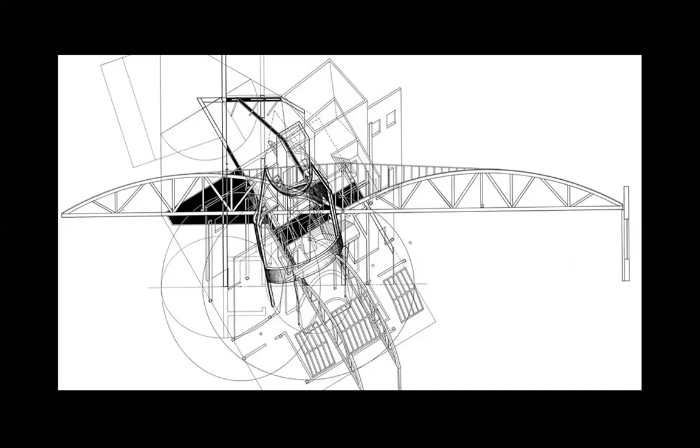And I hope to be able to somehow evoke what I want to say. Let me make sure somehow, okay, it is recording.

So his architecture is visceral, is both monumental and fragile. And I think he works with opposites, with paradoxes, with conjunctio oppositorum, and his spaces are very intricate, and the articulation is beyond the simple reading of reason alone.

In fact, in an interview, he said that he is animated by instinct. And what is instinct? Well, in a way, instinct is the opposite of the system. You know, instinct is visceral. It comes from your whole being. It doesn't come only from the brain.

And in this, I truly am on his side, because I think we overvalue reason. And while reason is necessary, Einstein himself said that reason should be just a companion and nothing else of a vital force, which probably can be approximated with what he meant by instinct.

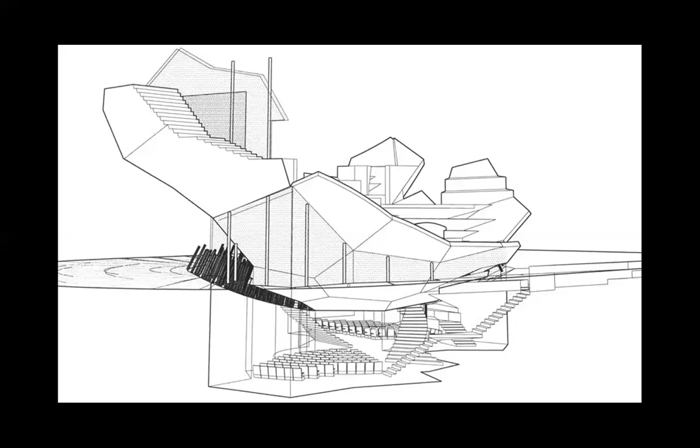So his architecture is subjective, but then is there only objectivity in the world? I am convinced it is not. Even the most so-called objectivist person in the world is subjective. There is subjectivity in the most extreme form of objectivity. So subjectivity is not only unavoidable, but it is actually an intrinsic part of life that could be beneficial if we only embrace it openly.

Unfortunately, again, the timid ones, afraid of allowing their subjectivity to manifest themselves, they torture themselves and others in the name of systems, methods, analysis, and so on, forgetting synthesis. And the synthesis is actually not done by the brain, and certainly not by the brain alone.

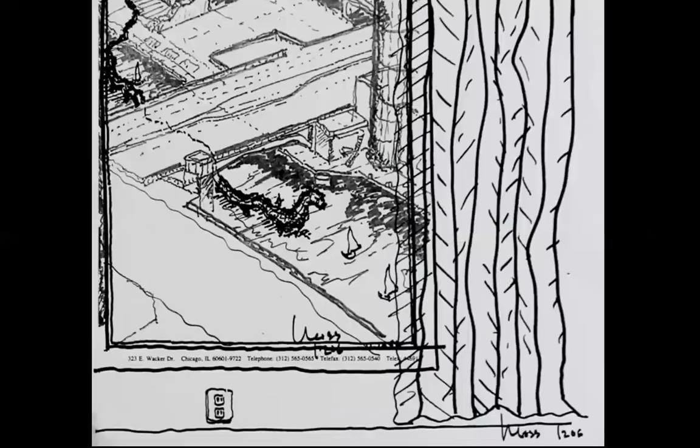He's trying to do a work which articulates complexity in terms of its own specificity, that is complexity. There is also a roundness in his work, which I would say somehow goes against some of the explosions and implosions of deconstructivism alone. But there is more to it.

For example, Wolf Prix said that in terms of drawings, Tom Mayne, also from the West Coast, who got the Pritzker Prize and runs Morphosis, that's his practice, is very good with drawings, while Eric Moss is very good with words. Well, I think both Tom Mayne and Eric Moss are good with both drawings and words, maybe in a different way. In the case of Eric Owen Moss, being that he was very and is very fond of literature, maybe also because his father, as I read, was a writer.

I mean, you look even at this drawing. This is not truly a modernistic drawing. There is nostalgia here. Look at these animals here in the water, and look, there is also an infantile, a childlike quality in the drawing, and the figurative part. I mean, look, we even have the electrical outlet here, and how the curtain is hanged and so on. So what we see here is a drawing, in a way, not really modern, and certainly not abstract.

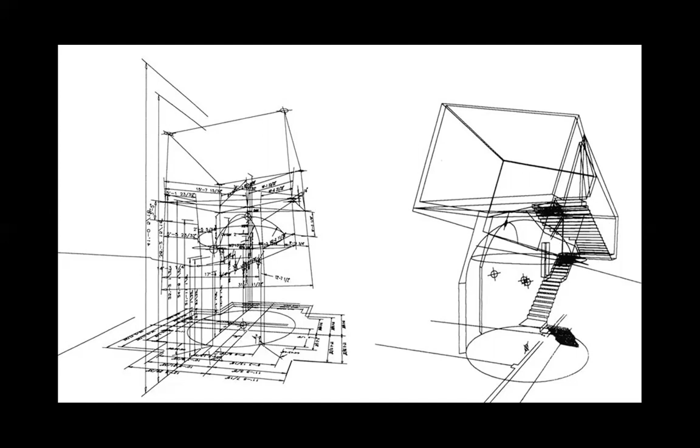His architecture can be very abstract and very so-called modern, although there is somehow a shade of medievalism, if I can call it so. We'll arrive at some works that exemplify this. Now we look at some of his sketches, a house he built. This is a man who doesn't seem to have a lot of inhibitions, and that's, I think, not easy to arrive at.

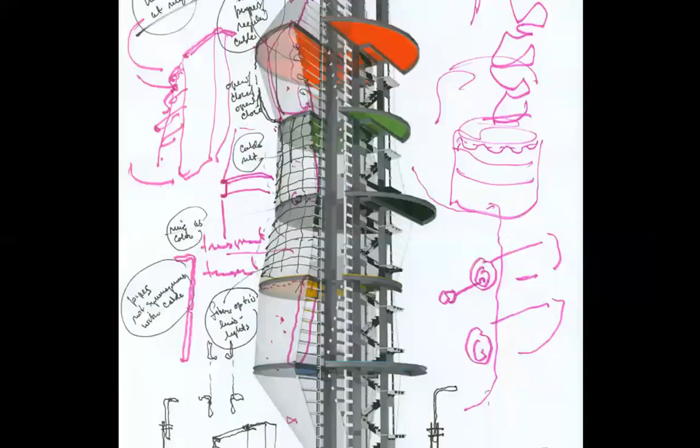This is the tower that he built in Los Angeles, and the structural engineer was our friend Bruce Danziger, who I was hoping he would be able to attend, but it is Sunday morning in Los Angeles, and anyway, who knows, maybe later he will show up.

But through Bruce, I was able to send the invitation to Eric Owen Moss. I mean, today I also sent him to his website, or his office, but Bruce did send an invitation to Eric 2 or 3 days ago. And Bruce was the structural engineer for this tower. We are going to see it in detail. It's an excellent construction, I would say.

So you see here, the rational system is sabotaged. And I think the rational system does need to be sabotaged, because reality is not only analytical, it's not only rational, it's not only strict. We all need freedom, we all need expression, and these things transcend the limitations of the system.

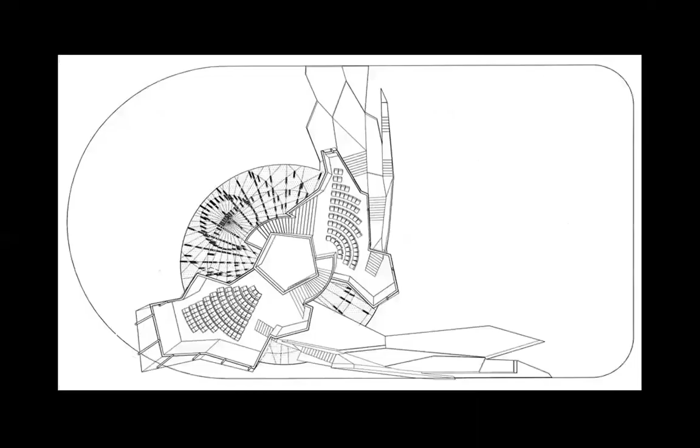Of course, he is using now developed technologies, maybe not as developed as in the case of Frank Gehry, but I think that the intuitive architecture, and maybe even the instinctual architecture, of Eric Owen Moss is different from, let's say, the one by either Frank Gehry or Tom Mayne.

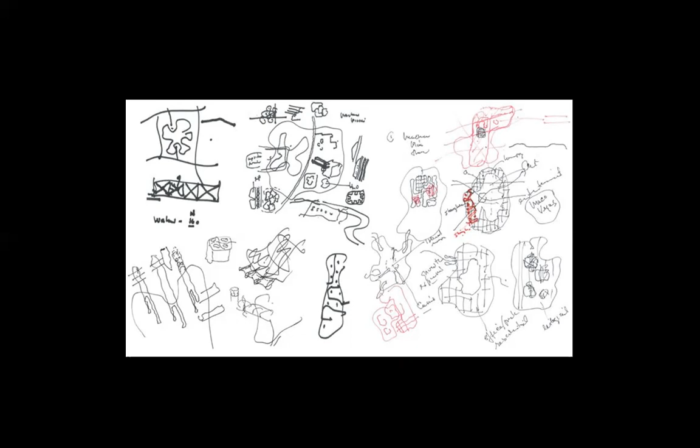There is a certain circularity, as if somehow Eric Owen Moss believes in the periphery, believes in the dissolutions and fragilities of the periphery, but also he believes somehow in a center, almost in an old-fashioned way, I feel tempted to say. This building was built, and we are going to see it.

It's very musical. It's very playful. It's a chance encounter with chance architecture. But he also has, as you can see, the circle, and even symmetry sometimes, like here, seems to be present. But then he sabotaged it. He also works with collages, like in this case.

Now we'll go chronologically through all the works that were mentioned in the Wikipedia entry on Eric Owen Moss. The triplex apartments in Playa del Rey, California, from 1976.

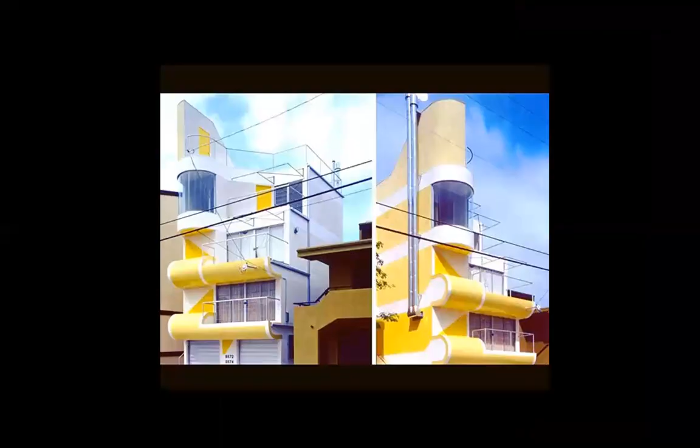Even by the standards of today, I would say that this building looks fresh and interesting. This is the model, as you can see. It's California. The colors are Californian, but we have to acknowledge it. It's a playful building, and I think it passes the test of time.

1976, so 24 plus 21, 45 years ago it was built, almost half a century ago.

Now, warehouse—I have to say he actually worked with a lot of warehouses and a lot of unglorious circumstances. Maybe you know already, he moved after he opened his office to Culver City, which at that time was, you know, a press city in a way. I don't know a lot about Culver City, but from what I read, when he moved in, there were a lot of parking lots and warehouses.

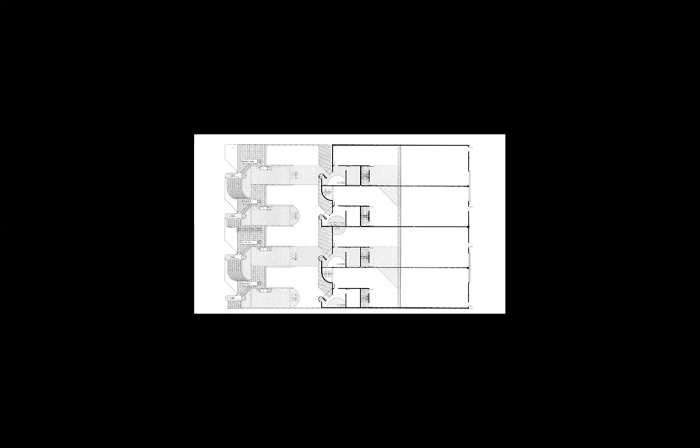'708 house. It's a house in Los Angeles. Still, I'm afraid, with pictures not with the best resolution, but soon I'll correct myself, and you'll enjoy large pictures.

1982. Even here, there are interesting things happening. I mean, look at that unperpendicular, or non-perpendicular, column here. These are, you would say, exoticisms. Look also at the innovative ornamentation of this facade, which is capricious, but is not disrupting the syntax of the building.

It is necessary, and I'm glad that Eric Owen Moss understood that building shouldn't be just structure, that you also need the capriciousness of ornament. And on the other hand, he didn't succumb to the incoming malevolence of postmodernism too much. Although there is a work where there is a little bit of influence, but here I think he's still pendulating between modernity and the playfulness, which is not rejecting the ornament that he welcomed.

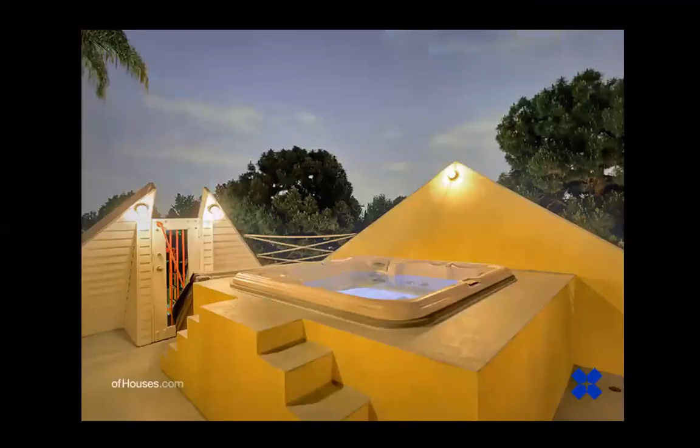So the petals open up at the top of the building where there is also this sauna or little swimming pool or whatever it is.

Now, the National Boulevard, 8522 on the National Boulevard. I don't know if I have pictures with this one. I do. Okay, now, thank God, we are beginning to have larger pictures.

I mentioned the medievalism in his architecture, and it's an interesting conjunction between the clashes of modernity, even the incoherences of a certain kind of modernity, and a certain nostalgia. I think Eric Owen Moss, despite his very convincing moving forward in architecture, also has, sometimes at least, traces of a certain nostalgia. I think he welcomes the labyrinth, zones of shadow which are somehow pre-Renaissance. Some of this architecture has scenographic qualities, if I can call them so. But all in all, it's an architecture which welcomes diversity and multiplicity.

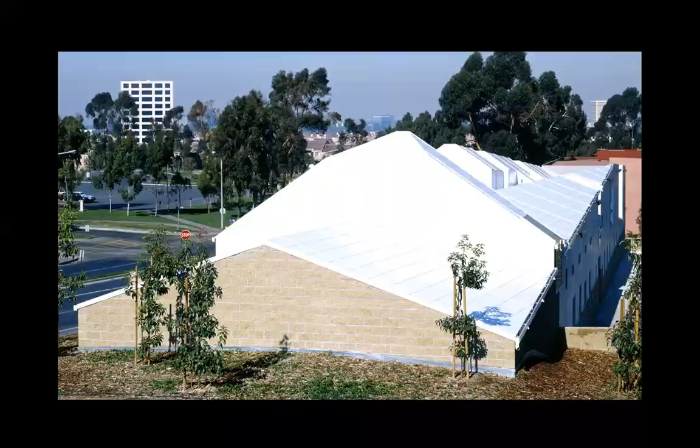The UC Irvine Central Housing Office from 1989. He built all kinds of buildings, not just in Culver City, but mainly in Culver City. I think his work achieves, on one hand, a level of cohesion because that is his city, so to speak, and also his most eccentric architectural gestures take place in Culver City. But this is a different city. And even here we see this ability he has to create multiplicity in unity. It's a building which does have unity, but also has fragmentation.

Here the purist might comment - I hope I have it, no, it's a little later on. Anyway, all in all, this is a building by Eric Owen Moss which does not contradict the following buildings we are going to see. He works both within the field of res privata, meaning private houses, and also res publica, meaning public buildings. I think he's able to bring the private into the public and the public into the private. Or, as Jean Nouvel said, bring the office into the home and the home into the office. And I think Jean Nouvel was right as well.

Lindblade Tower in Culver City, this is an interesting building, but it's not one of my preferred ones by him. When was it made? 1989. Yes, the 80s were a difficult period, in my opinion, in architecture because of the pressure that postmodernism put on architects and architecture, and it was very difficult to escape the seductions of looking backwards. This is not one of my preferred buildings by him, I have to confess.

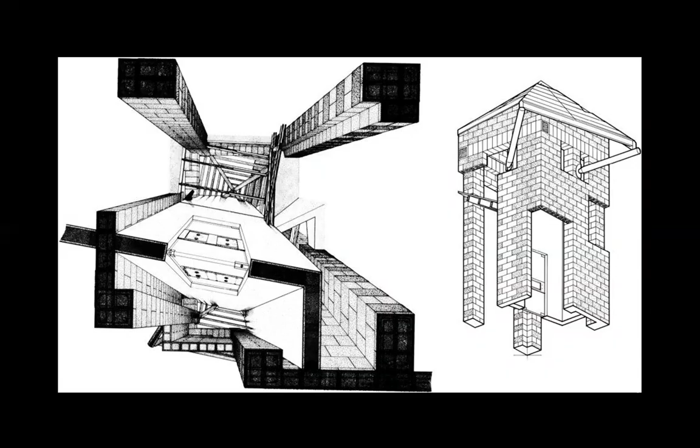Anyway, the joy of drawing. There is a voluptuousness even in drawing. He didn't have to do this drawing, but it's the exploration of the building through manipulating the drawing in unconventional ways. The drawing is important in Eric Owen Moss's work.

Now, Paramount Laundry in Culver City. We are now in Culver City, 1989. At that time, at the end of the 80s, I see a little bit of the shadow of postmodernism in his work, but he will transcend it.

The purist would protest this column here—does it need to be so majestic, although it is sloping to support this little corner, this beam? Probably not, but it's whimsical. At that time, many architects worked with similar gestures, like Stanley Tigerman and others.

Again, this work done in the second half of the 80s is to me a little bit problematic, exactly because there was something in the air then, and I know it well because I lived in the States at that time. It was very difficult not to be affected by a certain malaise which had to do with the approaching end of the millennium, and thus also a certain nostalgia, looking back to history and so on. This could be seen as a kind of commentary on the fragility of culture, even, not just of architecture.

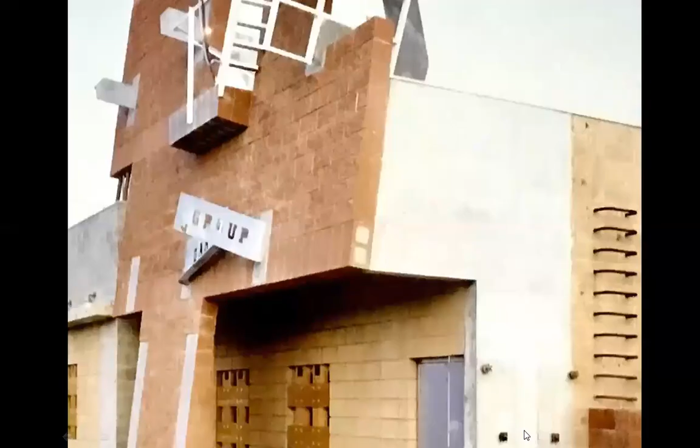This is an architecture that is disruptive because it has a certain theatricality. It is theatrical. It has something of stage design, but I don't know if I can articulate properly what I want to say.

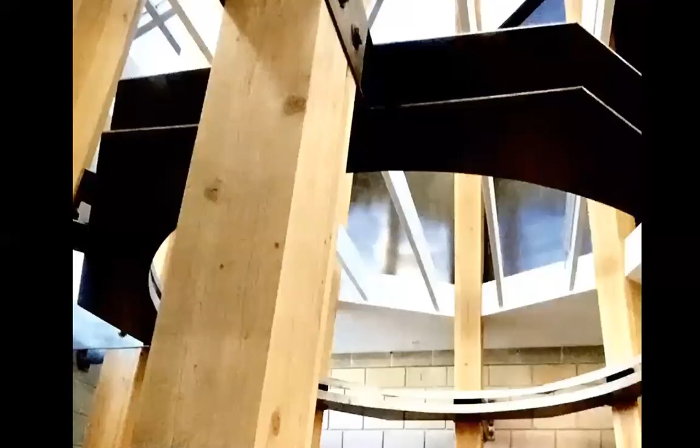There is an architecture that is rejecting the rationalist agenda, and it's promoting a certain imagery that is in a way inspired by history, but in a—I don't know how to say it. Maybe I shouldn't say it. I have a certain intuition about what maybe animated him when he created this—it's an architecture that is not giving up on the circle, but

at the same time is bringing in betrayals, the betrayals of dismembering, and I think somehow in this there are specificities in the work of Eric Owen Moss: the circle as a paradigm of wholeness, of unity, and then distortions and fragmentations which challenge the circle.

It has been said, I think this came from Giordano Bruno, that the world is a sphere whose center is everywhere and whose periphery is nowhere. You could also, paraphrasing Giordano Bruno, say the very opposite: that the world is a sphere whose periphery is everywhere and its center is nowhere. But then, is it still a sphere? I think Eric Owen Moss is, if not obsessed by the sphere, very interested in it.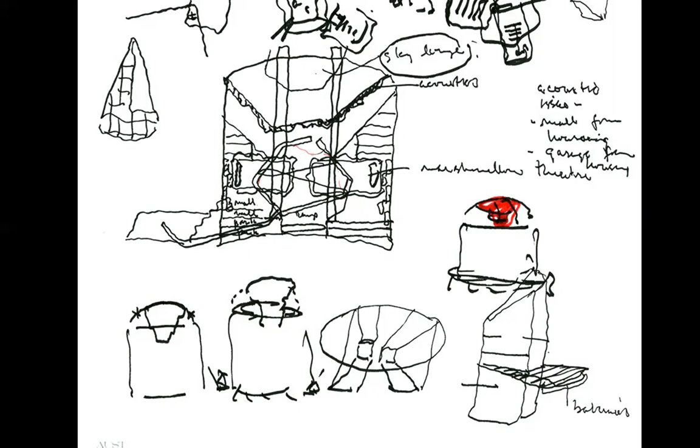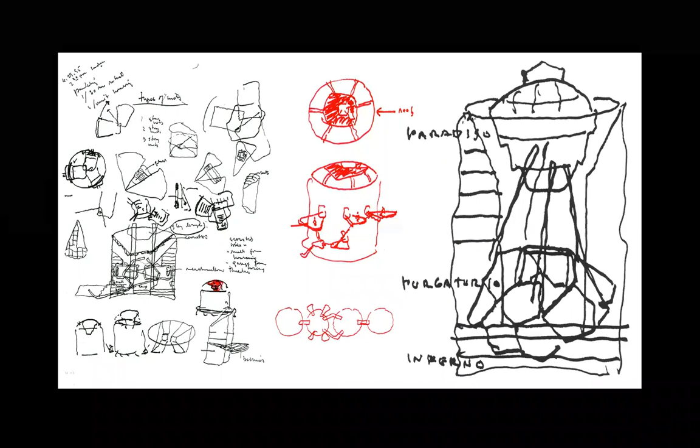Well, I see here references to Dante: Inferno, Purgatorio, Paradiso. Are we thinking of such matters when we design? It's true, we don't often have such occasions, but maybe we can create such occasions, at least from time to time. This is an interesting work here, and it's not just the tower, but also this building. He has influences from literature that are very informed, and those references sustain his imagination.

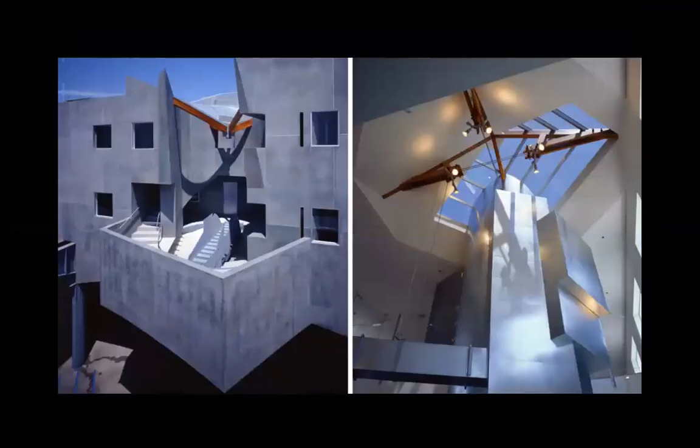I think we also have to acknowledge the presence of the mask. The mask in architecture is a theme which is probably worth considering, and there is a mask here. I think the mask can be very beneficial for architecture, even the veil, sparsity. For this one I didn't find pictures. Hayden Boulevard, another building in Culver City.

So you see, he's able to marry a certain rhythmicity that is almost rational, but then there are betrayals. And it's this conflict between a rational system, which is not totally developed, and something else, which maybe has to do with what he called instinct or intuition, or the irrational or the subjective.

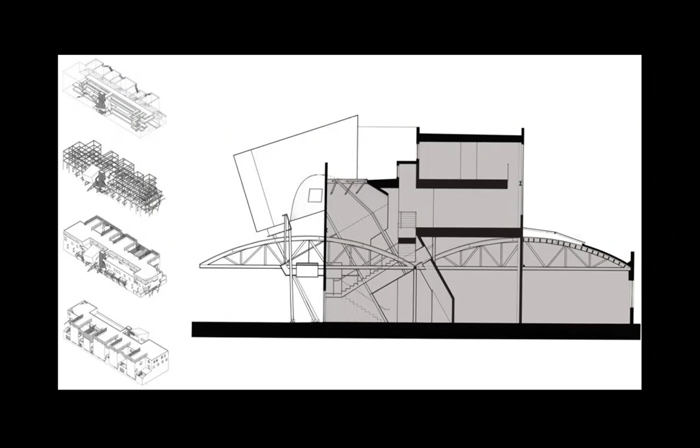Dancing bleachers - this I don't know exactly what it is, I didn't investigate, I only have a few pictures here. But as you can see, he takes risks, and if you inspire yourself from other fields and not just from architecture, like Wolf Prix said, if you only think of architecture, you'll only get architecture.

Well, Eric Owen Moss inspires himself from other fields as well, not just architecture. This is one of my preferred buildings by him, because of the umbrella which gave the name to the building, which is a brilliant architectural capriciousness in a way, is this thing here. The purist and the functionalist and the morose moralist would protest, would say that this is nonsense, what is the meaning of it?

But I would protest too against them, because I think in a way, maybe this is an explosion of the id, the one that Freud thought is the condenser in a way of our psychic realities, emotions. Yes, it is here that the id breaks the box and comes forward in unsettling ways.

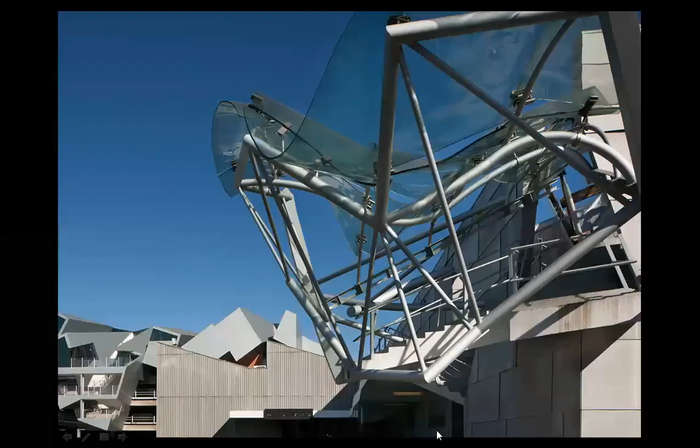In a way, what we see here is exactly what Walter Gropius was referring to when he said the artist is a craftsman who is exalted. This is about exaltation. Without this, the building probably would have been closer to prose, but because of this, it leans towards exaltation. And I think we need more exaltations in the world.

So this is the umbrella building, and this is another building by him. You already saw a sketch by him, some drawings, but we are going to look at it in detail. It's an excellent building. So in this city, you can see several buildings by him, in close proximity.

Now let's look at this picture again. The purist, the functionalist, and the morose moralist would protest and say, 'What is this nonsense?' But they would also protest against John Ruskin, who said that in life and in nature, the most beautiful things

are the most useless, and he gave us an example: the peacock's tail and the lily. And so this is like the peacock's tail, and if nature allowed herself or itself the beauty of the uselessness of the peacock's tail, why shouldn't human beings do the same? Sometimes when it is possible. Why not? What is the big problem with this?

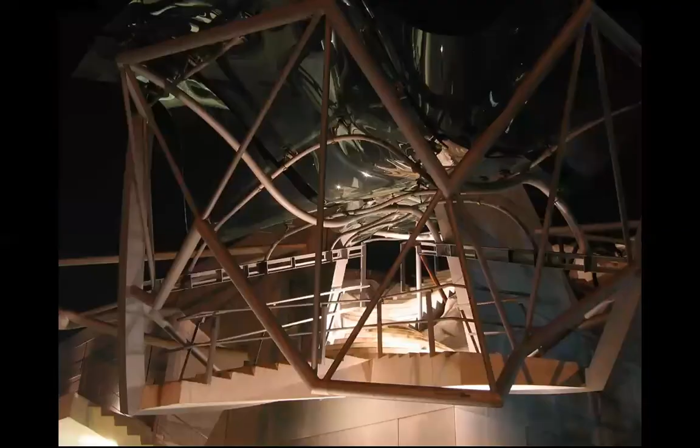And look at this, I recognize myself in this image. I see my soul, I see my torments, I see my dreams, I see my nightmares, I see my longings. Yes, I see my emotions, my subjectivity. What is wrong with that?

And actually, I think this stair that we can see here is better done than in many deconstructivist works, because in the deconstructivist works, the building might be exploded or imploded, but very often the escalator or the stair is conventional. In this case, the stair seems to long for being organic and disjuncted, and somehow closer in spirit and form to what is around it. And I think that's a quality.

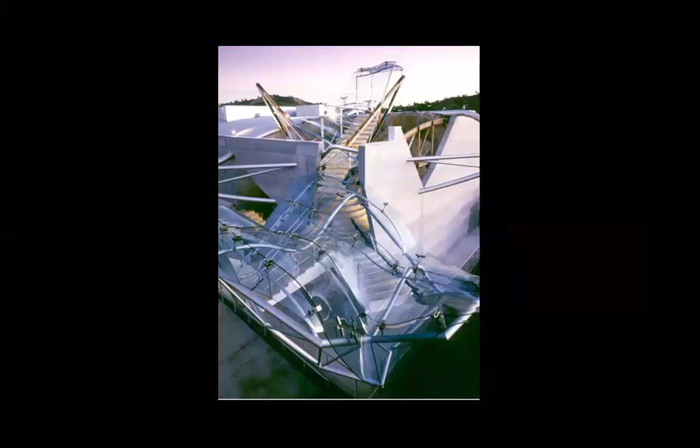Bravo, bravo to him, bravo to Eric Owen Moss. And I think this was done before the big changes in project making that parametric design and the computer brought in.

This one, I don't... no, I do have pictures of it. It's also in Culver City. We see that he's also capable of restraining himself and manipulating volumes and masses without the turmoil that we just saw in the previous work.

But yes, the diagonal and the inclined, the sloping surfaces, they exist. They exist because he's a dialectician, I would say. He constructs, but he's also aware of the other side, which is disruptive in the sense that it provokes

disjunctions and deconstruction. Yes, there is verticality. Yes, we have volumes which are clear cut, some of them even Cartesianly configured, like here, for example. But then there is the other side. There is always this play, this dialectic that I think informs his work. That's why his work is often surprising.

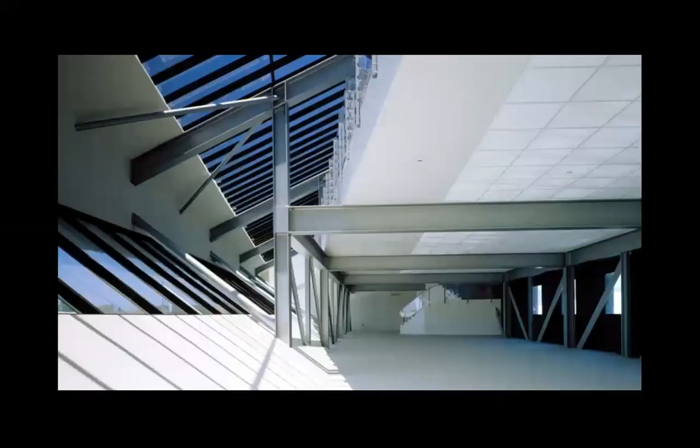Would we call this a clean architecture? Yes, it can be clean, if by cleanness we mean easily recognizable geometry, order, and less, much less disorder. But he assumes the disorder, which is dialectically correlative to what we call order. There is order and disorder, in other words, both.

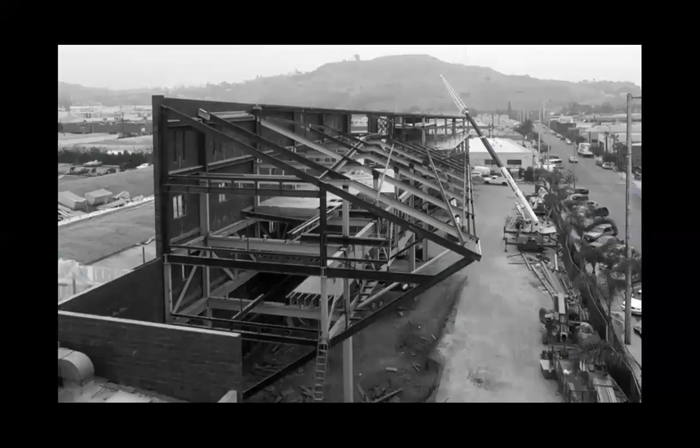During construction, but there are many events here. The entrance, look at this. There are many surprises and many architectural events in detail or at a larger scale.

Now, this is a project he did for St. Petersburg, which was not built. I show in this presentation a few unbuilt works by him, a few projects. There is a certain level of flamboyance here, but maybe it goes with a Russian spirit.

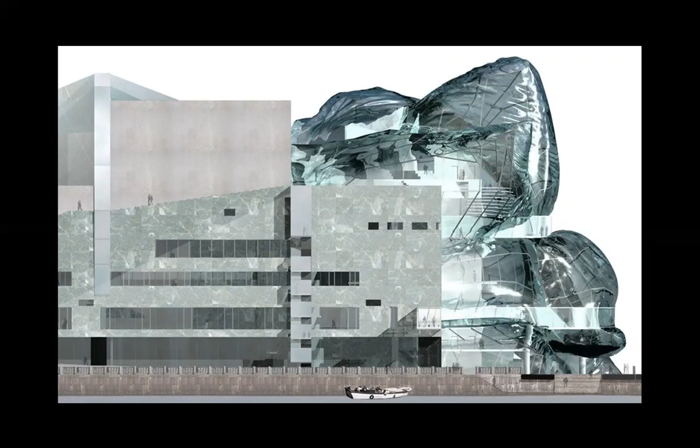And plus, it's a theater. It's supposed to be a theater, so why not? Otherwise, as we can see, the plan is very well organized and structured.

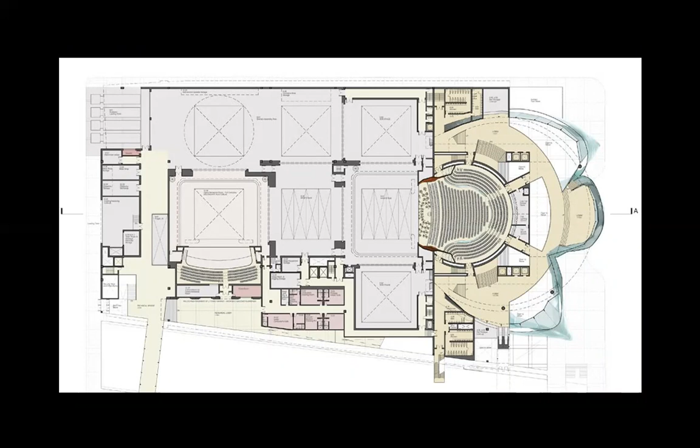Beehive, Culver City, 2001. And the beehive, it is indeed, well, to an extent, because it is abstracted, but towards, at least from this point of view, has elements of what might be called a beehive. As I said before, there is a continuous interest in the sphere, a deformed sphere. And you look at this image and then you look at this image and you see that the roundness of the world is challenged by a geometry which does not say no to even the acute angle.

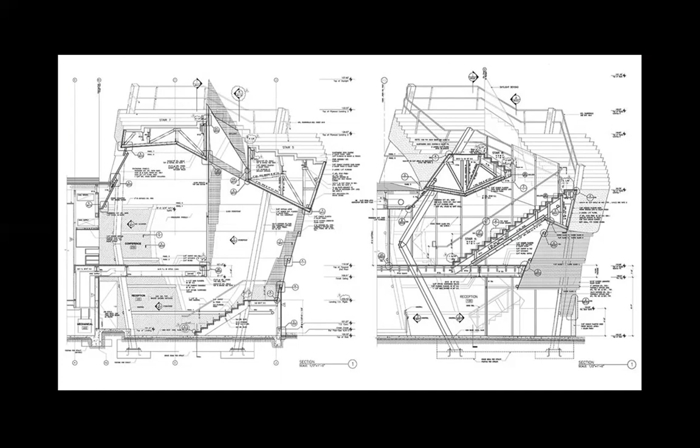I love these drawings. Yes, I cannot avoid our voluptuousness, because I think it is a pleasure to do working drawings for such visceral sections. In fact, there is somehow more viscerality in the drawing than in the final image of the work.

Maybe. This is a project that was not built, but I don't show pictures of it. This is a project where, for a competition I took part in myself. I didn't win. He won it. The Caterpillar in Los Angeles.

I don't know exactly what the function was here. If any of you is interested in this work, please search for it on the web. You can find some other information. I just show some images, but it is the same Eric Owen Moss in the sense that he's investigating what I would call again the viscerality of architecture.

It's a place maybe with some playful function. I read here, and maybe it's an interesting function for this, because he started, I guess, from the cylinder seal from various periods in the history of humankind. I don't know exactly what this was for, but as you can see, he's not just working with vectors and abstractions, but also with references to history for certain programs.

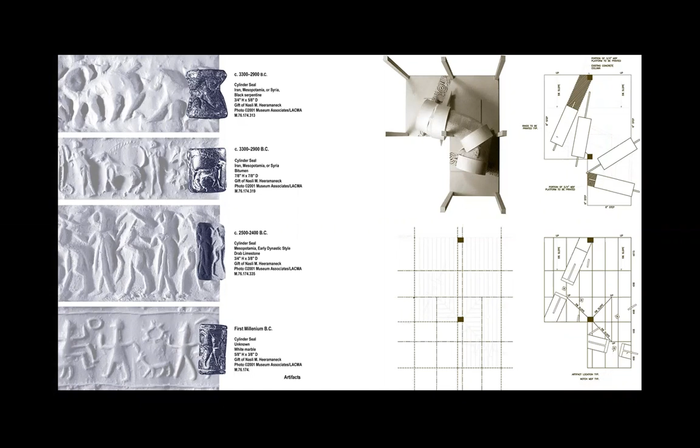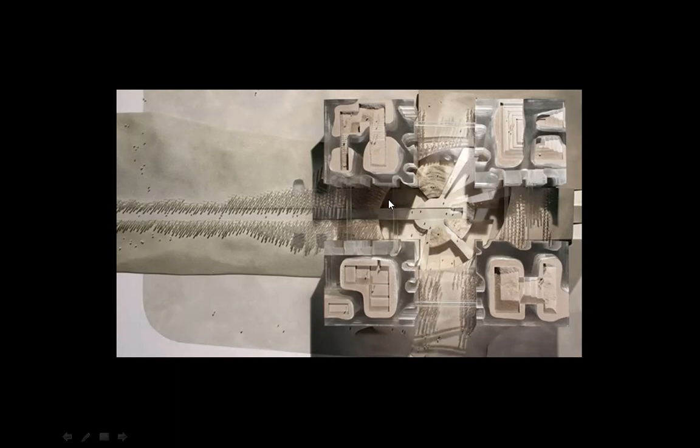If he is a conceptualist, he is not a dry conceptualist, because his signature is not dry, it's still wet. The Smithsonian Institution, the patent office building in Washington, D.C., was not built, but I don't have pictures. This one is unbuilt also, in China. I like the model, I like the top view here. I find that this is somehow very Chinese. I don't know if you ask me why, I don't know if I can tell you, I just feel it's very Chinese. Too bad it was not built.

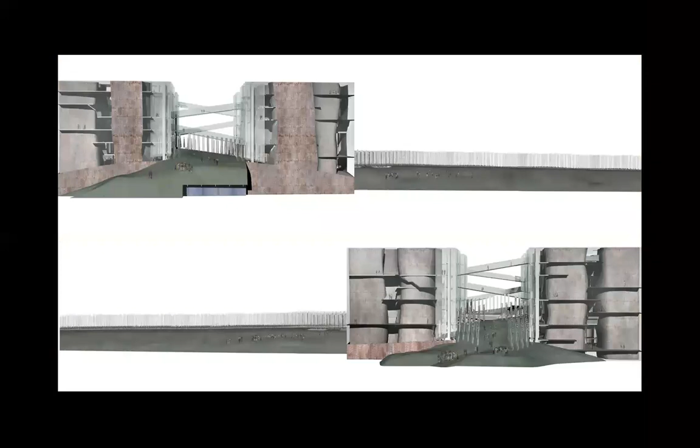Maybe seen from eye level it's not so much, but from the top, somehow the spirit of the work seen from above is a little bit simplified in these views at least, but this could also be misleading, these are just renderings. Huge museum, but it would have been an interesting work. I'm convinced, if it was built. Too bad it was not built.

He is without doubt, Eric Owen Moss, an architect who takes risks, and we didn't yet see everything. And his drawings, these are the drawings of someone who, in my opinion, considers history and the history of architecture very seriously.

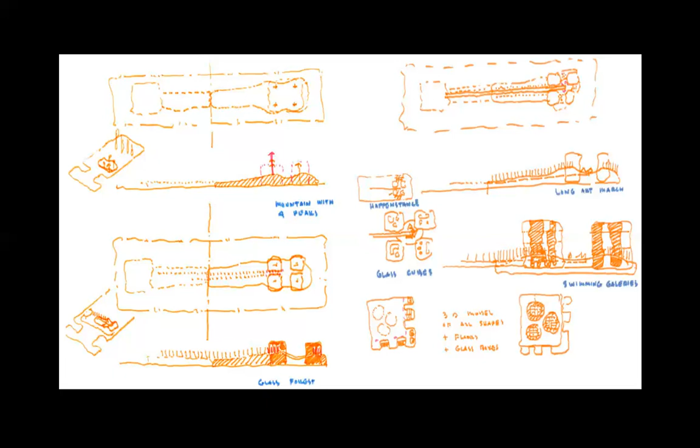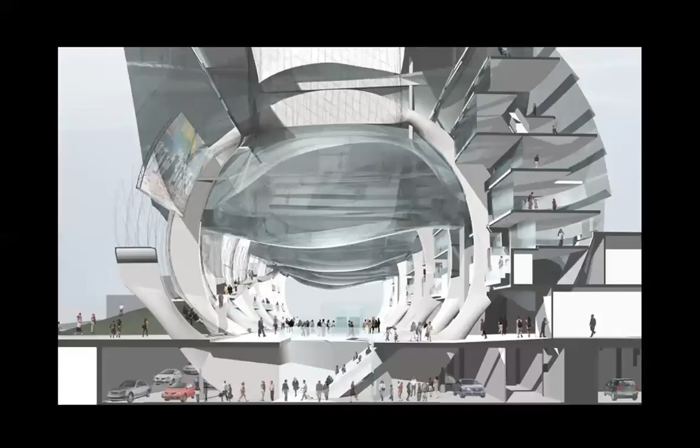Republic Square in Kazakhstan, in Almaty, from 2006. This is also an interesting project, was not built, but it can stir up our imagination, because he creates things which at times seem implausible. Like we'll see later on, an image from his Venice Biennial contribution for the Austrian pavilion. Again, roundness is present in his work in various forms, either bidimensionally or in three dimensions as a sphere, deformed or a little less deformed. But again, this is an architecture that could be uncomfortable, actually, exactly because of its uniqueness.

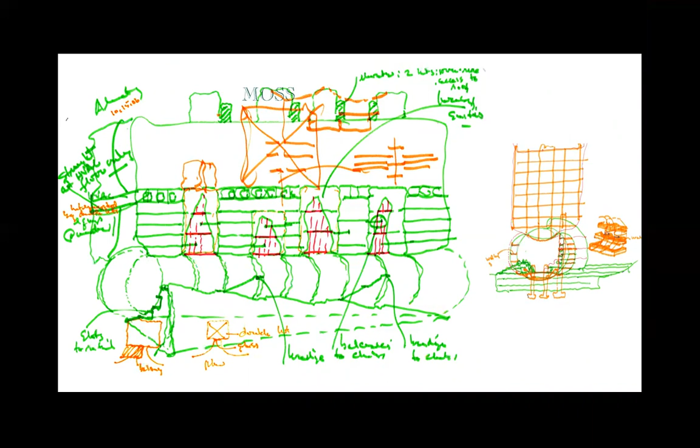I wish I had more pictures. Anyway, another building in Culver City, 3555 Hayden. This one is a little less interesting, in my opinion, or a little more predictable. Anyway, he did it, he built it. Not everything is supposed to be unseen before or so.

If not now, when? He did a project, I think, for Vienna, but also I have a book here from Vienna, which was given to us when I visited with students from Bucharest, and I think he has an article he contributed to, called the 'Massive Attack' Symposium in Vienna, and I think the title of his talk was exactly this. Let me verify if it is so. If not now, when? If this is what it is, I would like to read it to you, if it's not too long. The talk he gave in Vienna was called 'Build Your Cities on the Slopes of Vesuvius.'

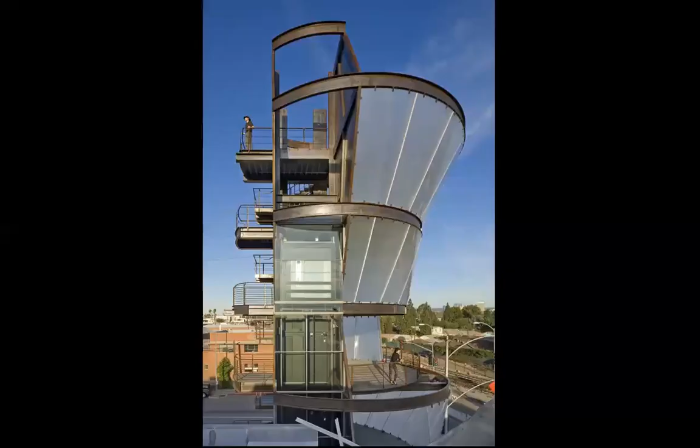Now we arrive at this tower, which I like very much, where Bruce Danziger was the engineer. It's part of that complex, Samitaur Tower, also in Culver City from 2010. It's Californian, but maybe I shouldn't locate it so strictly. I felt like saying it's the Californian replica to the revolutionary towers in Russian constructivism. The fact that he was able to actually build this is almost miraculous. I wonder who paid for it, and what is the function, I mean, this is not a mercantile building. I don't know its function. Somebody paid for this building, but the building seems to have an idealism which is in contradiction with high capitalism.

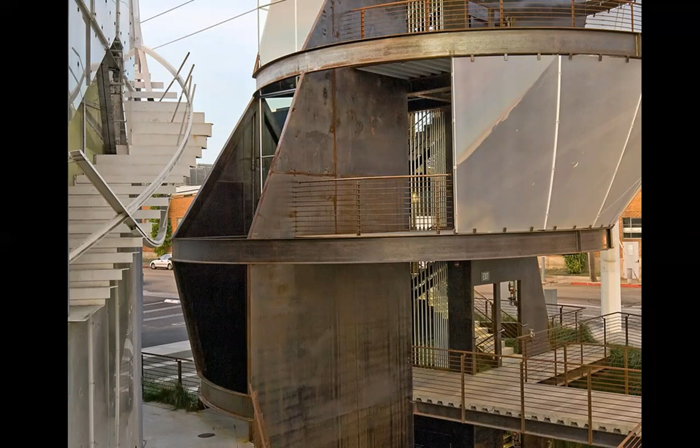So Dan, it's meant to be like a clock tower. Bruce, welcome, now you have to tell us about it. So what is it? Frederick Norton Smith and Laurie Samitaur Smith, his wife, they have a lot of property in Culver City, and this is right at the entrance of that area, and it's meant to be like a clock tower. So you'll see in some of your images that things are projected on it. So you said it's a clock tower? It's like a contemporary clock tower, people don't need it to tell the time, but maybe you could project cultural images. So you'll see there's those acrylic, those polycarbonate, plexiglass panels. There's projectors behind there that project, and they have artists come and curate projection images.

So I was right, this is an idealistic tower. It doesn't have a pragmatic function per se, no? Like the towers in Florence, the Medici Tower, does it have a function? Well, yes, but then you had the great Mecenas, they themselves had idealistic aspirations somehow. I'm surprised this kind of tower was built in Culver City without... does it generate an income, this tower? Probably not.

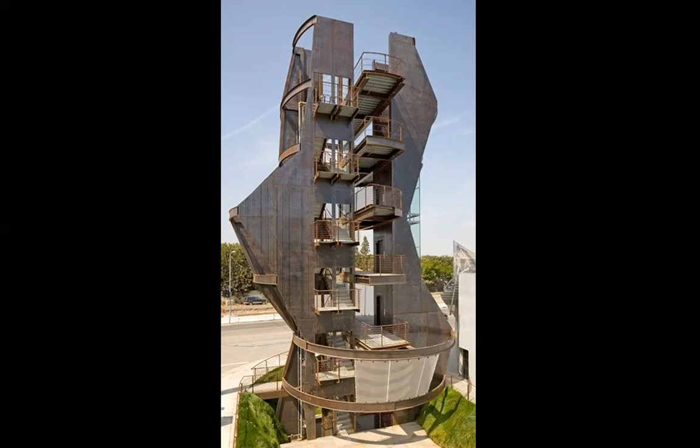I love this view, and I know he's very appreciative of this tower because I read some things about it. And maybe it is true what John Ruskin said, that I quoted from him, that there is a certain level of beautiful uselessness in this tower, which makes it even more beautiful. And maybe, my God, we could create beautiful things. Now I know I could be accused of being a hypocrite because in the case of Olgiati, I commented on the uselessness of certain parts of his work.

I'm not against uselessness, it depends. But for example, I feel much closer to the work of Eric Owen Moss because I believe he told the truth when he said that instinct is very important for him. I mean, I don't know him personally, but I think he's quite capable of handling rational matters. But he allows for these capricious decisions to also happen. And in all his works, I see the presence of something else, which is not reason alone. That's something else I try to approximate with the tale of the peacock, referring to Ruskin, or to Id, coming from Freud, or instinct, intuition, subjectivity.

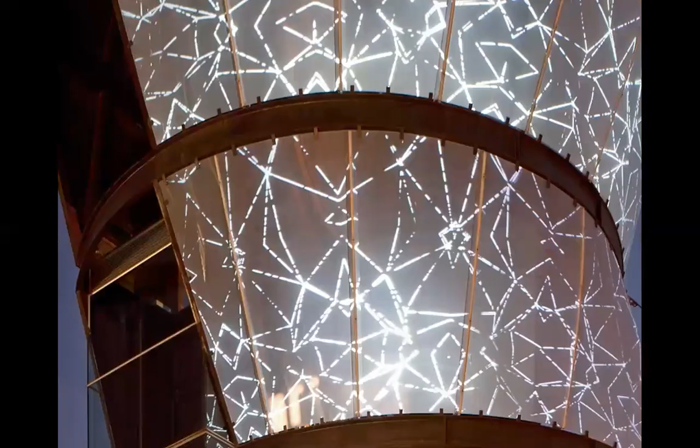Bruce, please help me with other words if you want. But I see in this tower a celebration of what I called before, using Ruskin's words, the peacock's tail. You know, I think we need such things in our lives. Okay, it's not always possible, not everywhere we have Florence, not everywhere we have the developers that luckily Eric Owen Moss works with in Culver City. But maybe in various ways it is possible to invoke the presence of the peacock somehow.

It doesn't matter if we are rich or poor, it doesn't matter, I think we can, because this, in my opinion, is about freedom. It's about the human spirit conquering strict necessity. What do you think, Bruce?

Yeah, I like where it's going, Dan. I'm kind of challenged to put it in a box, right? Okay.

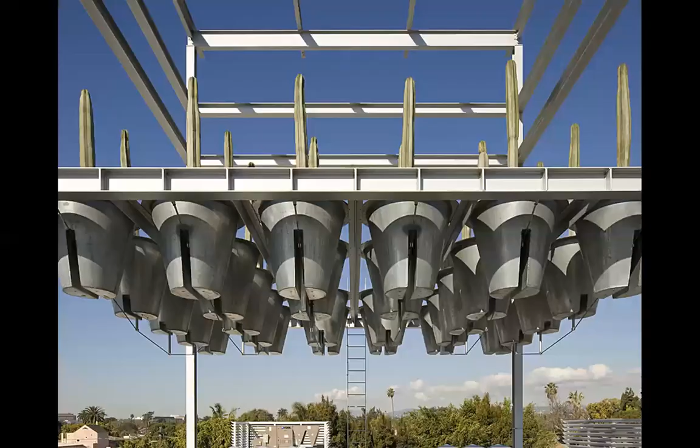So we go to the Cactus Tower. This is an interesting tower, very different from the previous one. At first I didn't understand why it was called Cactus Tower, but it's because cactuses are placed here - you see the cactuses. I don't know if he had this idea, or exactly why it was built, but again he's a surrealist architectural presence here. Who thinks of creating a floor only for cactuses?

What's going on there in Culver City? I have a feeling it's a place with some dreamers. Some people paid for this. I love it actually - I love the fact that Culver City is the home of the Wizard of Oz. That's where the movie was filmed. It has a history of movie studios going back 100 years.

This is very interesting. I think this is also his building, right? Here. We are going to see it a little later.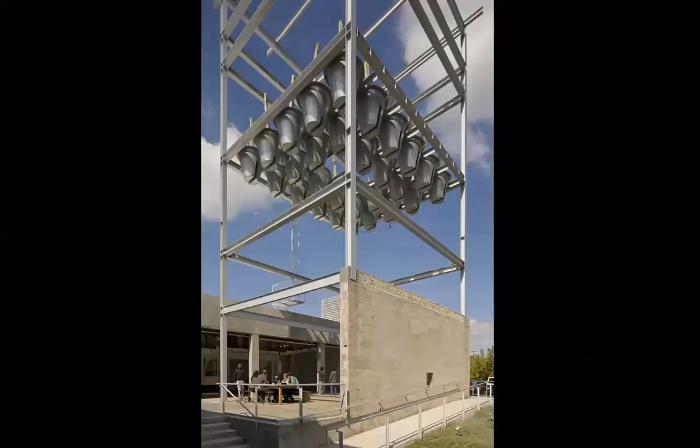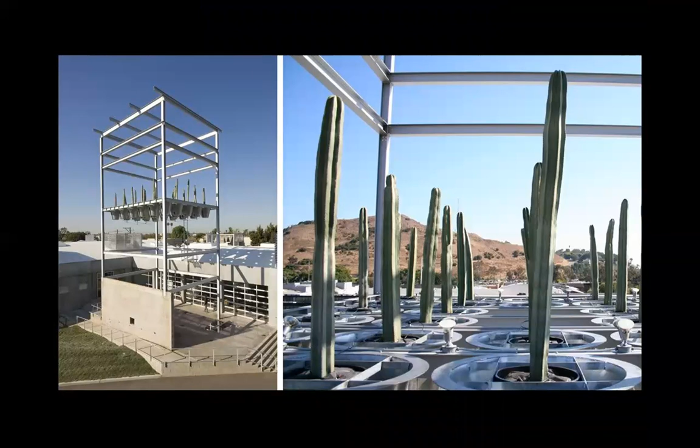This always puzzled me and continues to puzzle me - the meeting within North America, meaning the United States, between pragmatism and idealism. That somehow, sometimes at least, pragmatism at its edge becomes its opposite. Someone paid for this tower. I understand there is a room here, because I saw a picture from the inside, but everything above it is dreaming, really. It is dreaming. And I imagine it was not a very inexpensive dream.

I personally welcome surrealism in architecture. Although, again, someone would say, wait a minute, if you welcome surrealism in architecture, why were you so against that store by Golgiati? It's probably a good question. I have to reflect on it.

Do you know, Bruce, what is the function of this tower? What's going on in these spaces here? Oh, it's just in front - it's like a folly in front of an office.

So there's this area in Culver City called the Hayden Tract, named after one of the main streets. It's owned by this family, and they have a strong business case here. Their idea is that if you build art, you get higher rents. So you get media companies and advertising companies willing to pay higher rent if their office and the architecture is art. Right, so that's the premise.

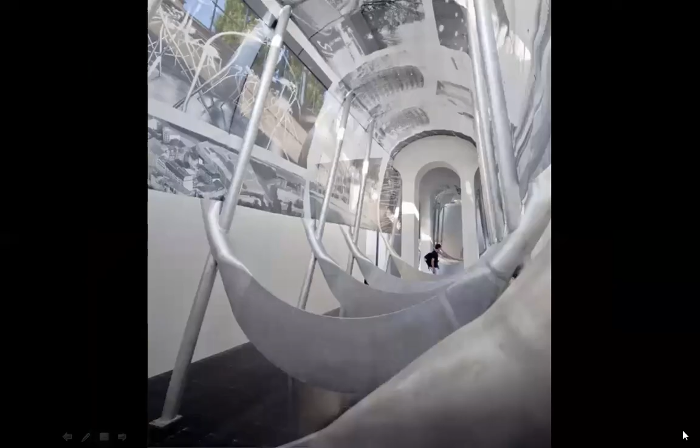For how many projects did you collaborate with Eric Owen Moss? Well, like 4 or 5. And so I know of 2 now. What other projects? I have here all the works that are mentioned in the Wikipedia, the American Wikipedia. Anyway,

But this is interesting - maybe you, Bruce, know something about this project in Barcelona, Tèrmiques del Besòs. No, I don't know anything about this. Almost science fiction, it's a technical project. I don't know what this means in Catalan, Tèrmiques del Besòs. I plan to investigate, but I didn't. But the work has, again, that reference to the medieval world, but also to futurism. It's both futuristic and with something medieval. I think such conjunctions are present in his work, at least from time to time.

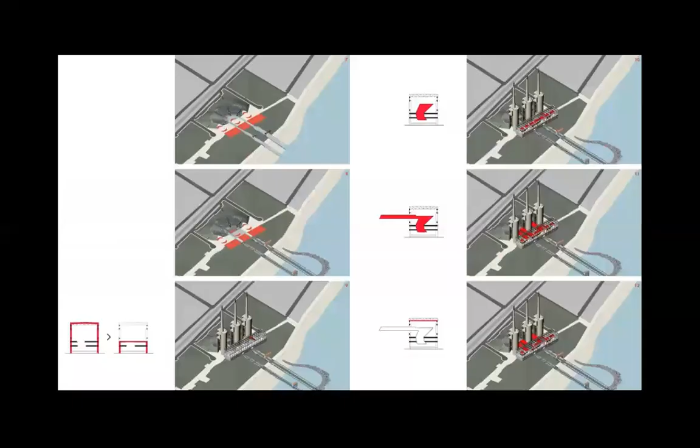These are giant, and they do have presence. I hope they build that.

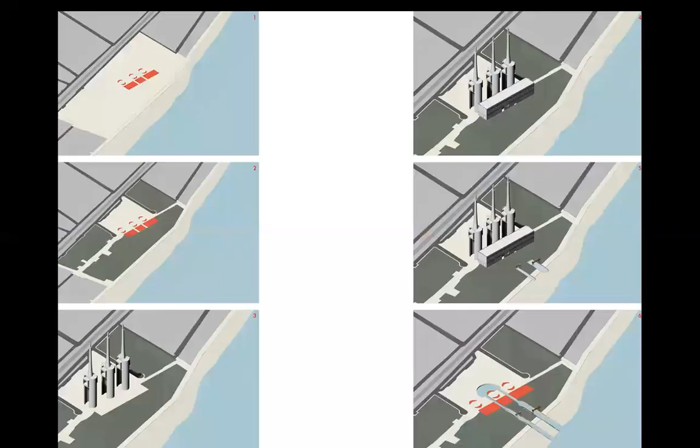The round towers, which for me are somehow medieval, because they are not glass towers, but they are opaque towers. Yes, they evoke for me a certain liking that I imagine he has for the medieval world.

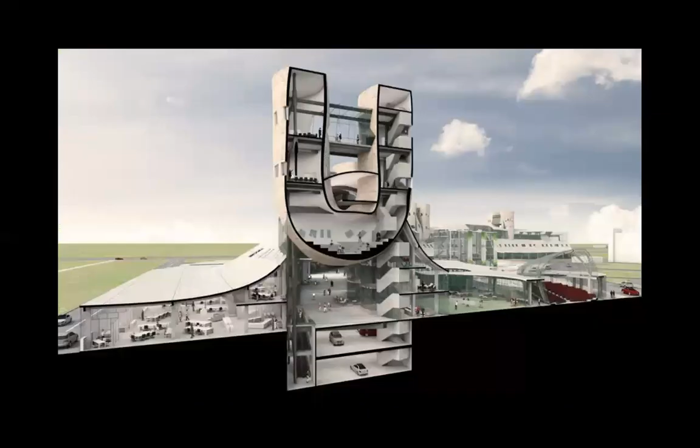I think his architecture is a difficult architecture, could be, sometimes. Like here, you have these opaque towers, sometimes contorted, with this unusual bottom, floating almost on thin air.

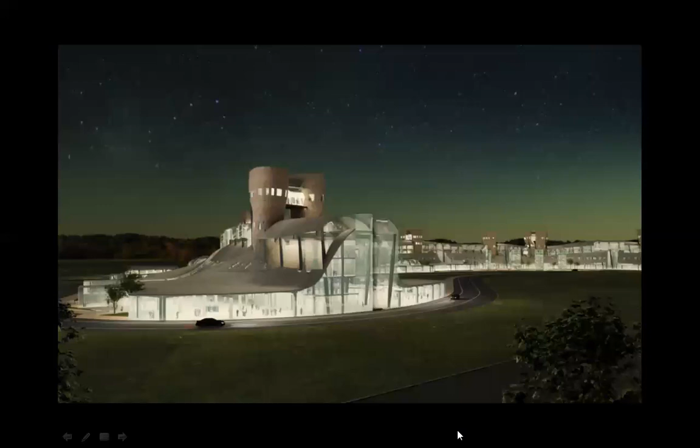But it could have been perhaps appropriate for Russia to build something like this, because I think the Russian culture and the Russian spirit do have a dimension which is in a way like this, a little bit almost burlesque, phantasmagoric. I don't know very well how to describe it now.

I think Eric Owen Moss also is not afraid to assume even what might be called the ugly. And maybe here I can recall the words of Peter Eisenman, who was searching for the grotesque, a play on the grotesque.

There are meetings between what we call the beautiful and what we call the ugly, between the princess and the dinosaur or the monster. And the sublime, as Peter Eisenman said, was born exactly at that juncture, at that meeting between what we call the beautiful and what we call the opposite of the beautiful. You can call it ugly or monstrous even.

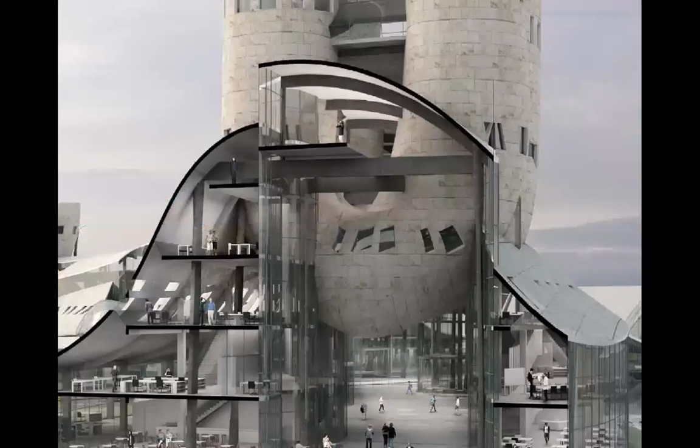This is a difficult topic. Maybe the beautiful in itself is not enough, because the beautiful by itself does not arrive at the sublime. In order to arrive at the sublime, you also have to assume the opposite of what is beautiful. But what I see here is a fantastic architecture, and I regret it was not built, and probably it will not be built.

We are approaching the end of the presentation. It would be interesting to even study these sketches and read what he wrote, and to discover the sources of the design.

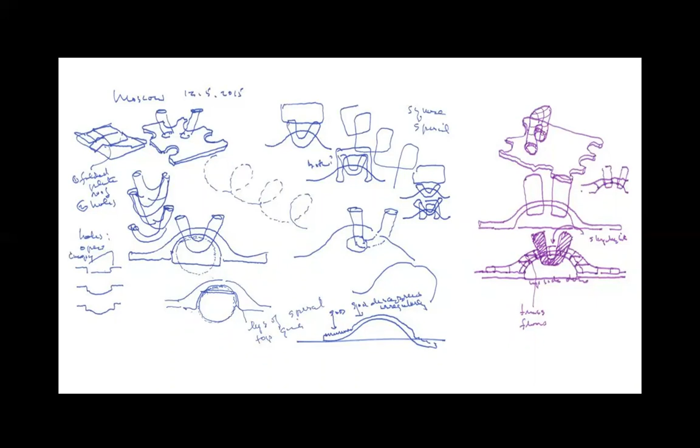I think Zaha Hadid also worked for this project. It might be that this image is actually from Zaha Hadid, I'm not sure.

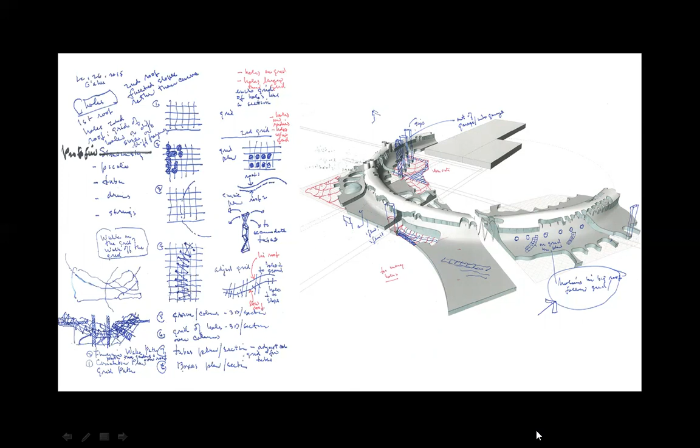And I like his sketches, les mots et les images, the words and the images. You can tell he's not - I mean, he talks about instinct, but there is also reason here, clearly. Even in the graphic aspects of his sketches, you can tell he can be very organized and logical, and he works with points, A, B, C, D, 1, 2, 3, 4, and so on. So he's not just this instinctual beast, so to speak.

No, far from it. Vespertine, Culver City. This is a newer building from 2017.

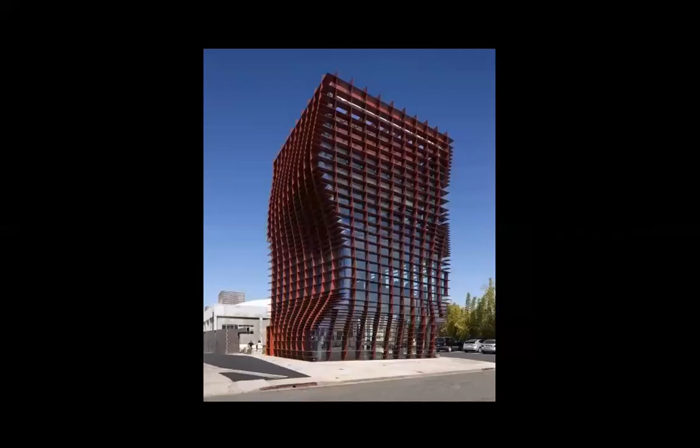He's building now - we are approaching the end of the presentation - another tower, not an excessively tall one, certainly not like the ones built by SHoP in Manhattan or Brooklyn. I like this building, it's again the problematization of the grid as an expression of reason, bringing in the other forces, the subjectivity, the subject, what is subjective, the irrational, the curvature, the capricious, maybe meandering, and yet it is structural, it is ordered.

It's a good tower, I would say. And I like the fact that you can't easily read how many floors it has.

So although he talked against the system, he can also be systematic, but not in a dry way, because his signature is not dry. So the system is humid, if I can say so. It's not a dry system.

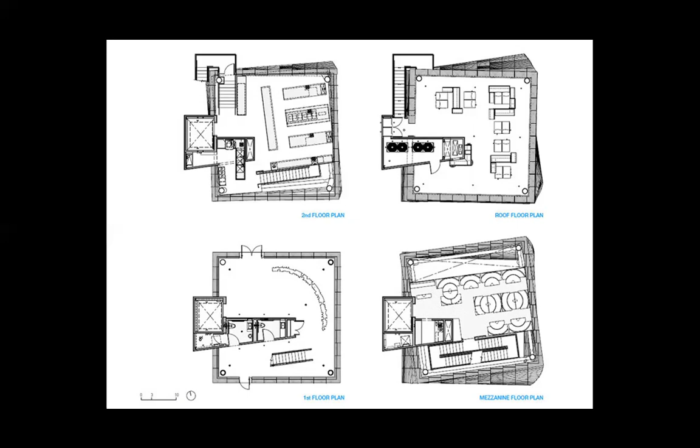Now the Wrapper, and now we end our presentation on his works. This is a building that is still in the process of becoming, but construction started, and we'll see a few images.

I'm particularly fond of the knot. I like knots, and I like this kind of - what is the knot? The knot is an expression, in a way, of the unknown. And it is a scandal for the intelligence. It is a scandal for reason.

And this building is telling us that things are not as simple as previous forms of functionalism or international style or rationalism and Cartesianism, objectivism claimed. The world is a web now. It is a web, and I see that this is a webbed building in a way. It's a woven building, and I like this aspect of being woven, and I like the knot.

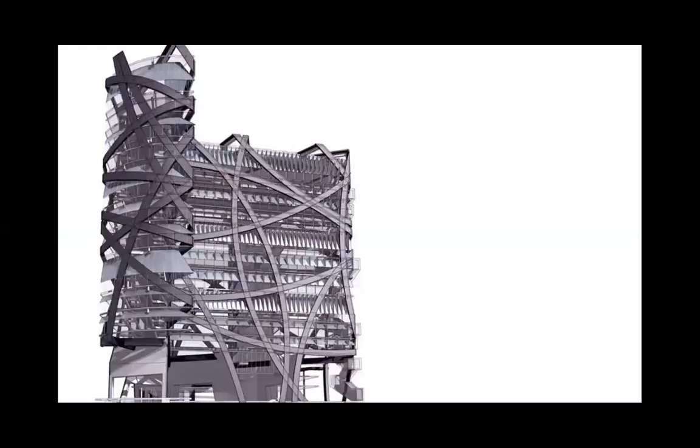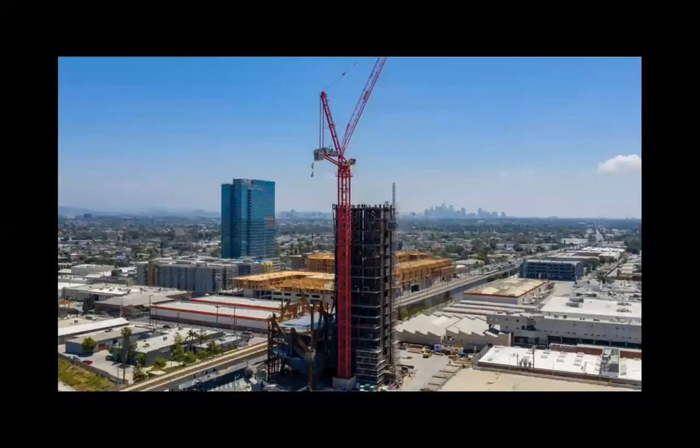And I'm glad it's being built. Here it is, the construction site. Another adventure by Eric Owen Moss.

And as I keep saying to myself and others, architecture is beautiful and worth pursuing if it is an adventure. If it is not an adventure, then - well, life itself is beautiful if it is an adventure. But we know that adventures have luminous parts and parts which are problematic, sometimes even painful. What can we do?

So here it is. The adventure started, and these people are willing to move forward, as we can see. The building will be built, is being built.

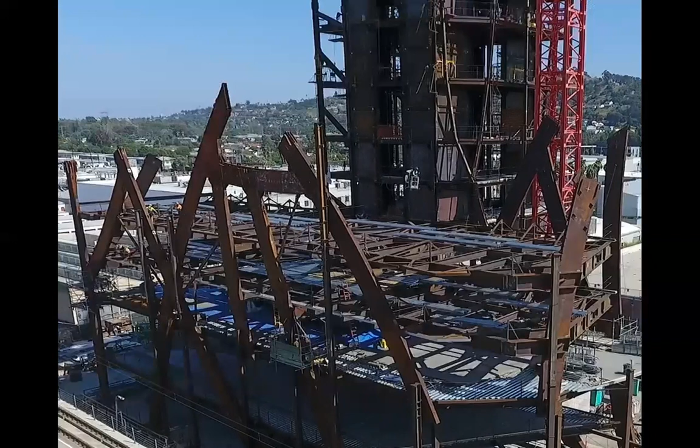Thank you, Eric Owen Moss, and thank you, Bruce, for being here. Happy birthday, Eric Owen Moss.

And as I said, even though he is not here now, I will send him the presentation. Even though it could have maybe been better, it is our sincere homage to him.

I also want to say that, in my opinion, he deserved the Pritzker Prize for assuming the adventure of pushing forward architecture. And if Steven Holl received that immaterial and unofficial so-called other Pritzker, and if Wolf Prix received it, and if Bernard Tschumi received it, and if Enric Miralles - well, he didn't receive it - but I thought of offering him this prize because I think he deserved it too.

It didn't matter that he's not alive with us. I think he deserves it, and so does Eric Owen Moss.

And in the fall, I'm thinking to do the same with Peter Eisenman. So then we'll have Steven Holl, Wolf Prix, Bernard Tschumi, Eric Owen Moss, and Peter Eisenman - 5 architects who didn't get the Pritzker Prize, and maybe they don't miss it. It's after all just a prize, but it's about recognizing a level of excellence.